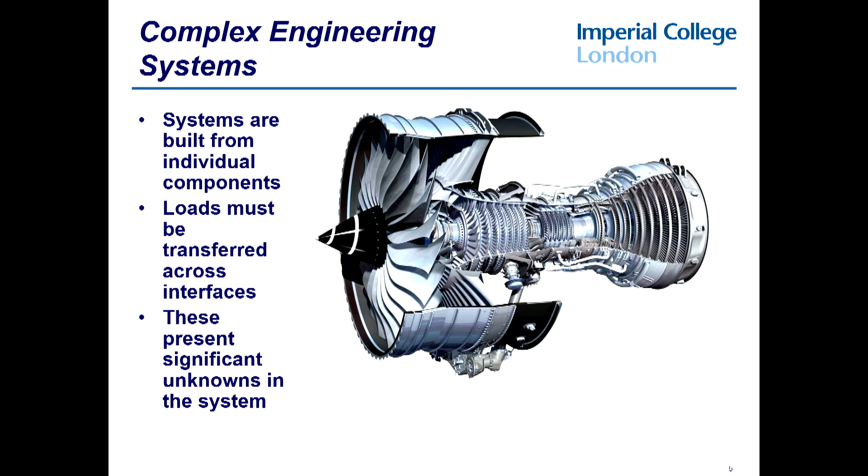And the same is true of the compressor, which is the next stage back, and the turbine, which is back here, and so on. So you can imagine that we've got a lot of loads, and then this thing has got to be mounted in a nacelle, and it's got to be bolted on the wing in such a way that A, it doesn't fall off, and B, that it transmits the thrust loads which it's developing to the airframe, because otherwise the engine is going to go off and leave the aeroplane behind, which is not a terribly good thing. And the thing about those contacts is that they actually present significant unknowns in the system.

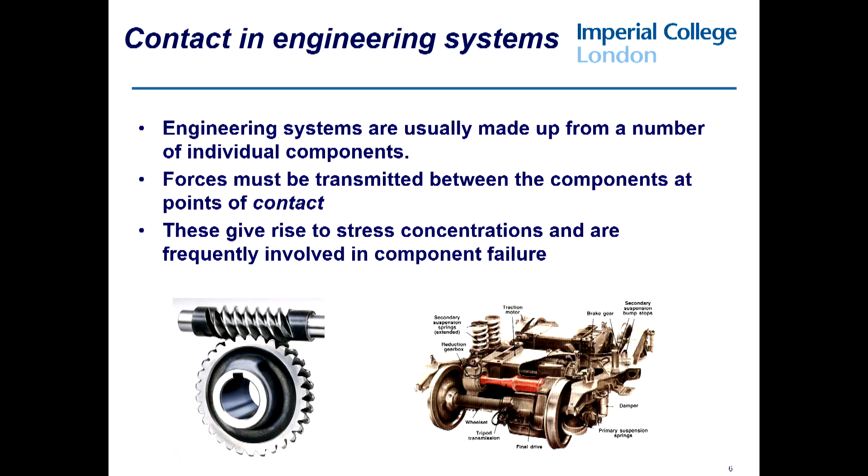So we make our systems up from a number of different components. We've got to transmit forces at points of contact between those components. These give rise to stress concentrations, and they're frequently involved in failure, but they also present us with significant difficulties when we come and try and simulate the system on our computers. And simulation is becoming increasingly important, of course, because testing is very expensive, product cycle times are coming down. We simply don't have the luxury of building something, seeing how it behaves, and then refining it.

I'm told that when you go to Dyson's place in Wiltshire, there's a sign in the entrance, and it says 1,000 prototypes to build the first vacuum cleaner. And that might sound very impressive, but of course it would have been better if it had been one. So, building a lot of prototypes is not necessarily a good idea.

So, it's fairly obvious we can't make complicated things out of a single component. We need different geometries, we've got restrictions on size, we need different materials, and fairly obviously as well, those of you who are engineers in the audience, we love taking things apart, and if it was made of one component, we wouldn't be able to take it apart, and that would be a severe disappointment to us. But transferring a load across an interface is not easy, and it turns out to be a very complex process. Even if we take the simple case of a normal load, where we're simply transmitting pressure, it's quite difficult to design the interface without leading to concentrations of load and concentrations of stress.

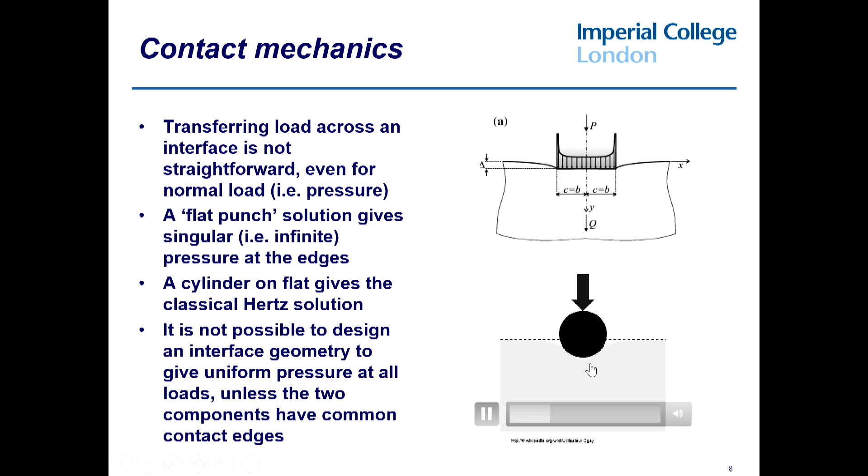So, for example, if you take a flat punch and you press it down onto a surface, you might think that that would generate a uniform pressure. But in fact, what you would find is that there are stress concentrations at the edge, and indeed, if the punch is rigid, those concentrations become singularities. So pressure becomes infinite at the edge. If, on the other hand, we take something like a cylinder and we push that down, you will see that you get deformation of the two bodies, but the pressure will be largest in the middle, and it will fall to zero at the end.

And it turns out that it's not possible to design an interface that carries uniform load across a range of loads, unless the two components perfectly match, and then you start to wonder why you've got two components in the first place. Okay, so that's contact mechanics.

What can go wrong? Well, this is one of my favorite video clips, and I apologize to those of you who've seen it before, but you will understand why I want to show it. It was on Australian television news. Can we have some sound, please?

To dramatically abort its takeoff from Melbourne, tonight preparing to finally fly out of Australia.

Oh, I did say it would do this.

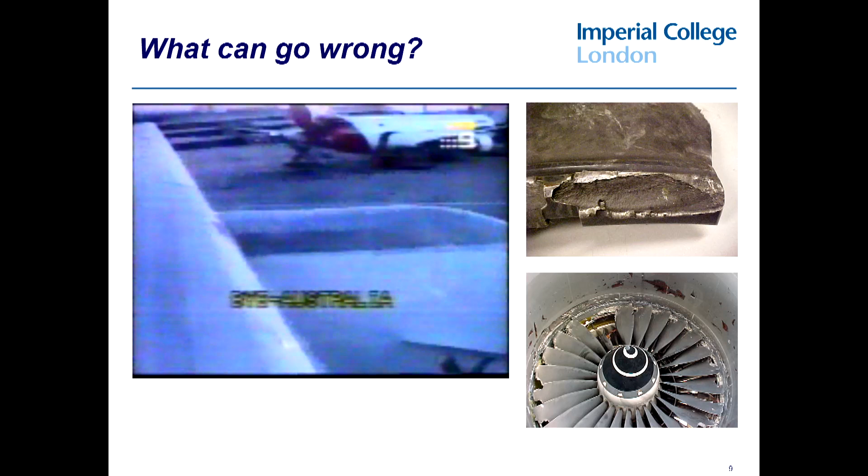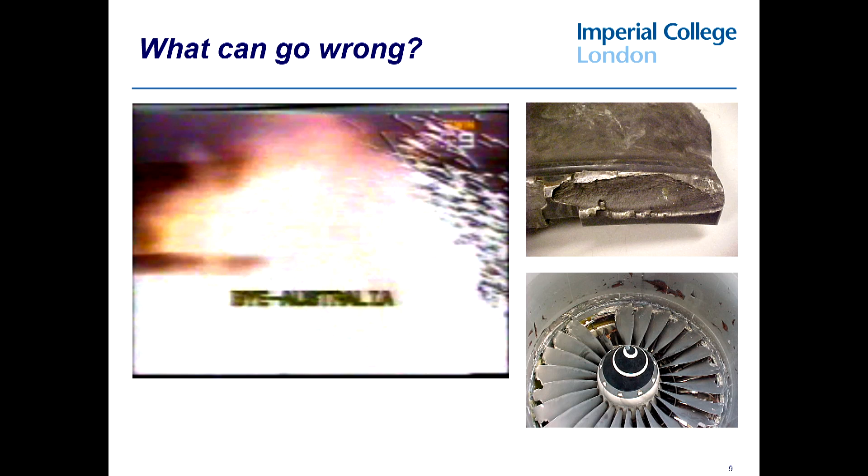It was a frightening experience for those on board when an engine of the Emirates Airlines jet burst into flames as it rolled down the runway. One of the 213 passengers happened to be filming their farewell to Australia as the Emirates Boeing began to take off just before 9 p.m. As the flight crew accelerated the engines, they all got the fright of their lives. A loud explosion. I actually thought a bomb had gone off on the aircraft. There's a big flame and the jittering and the...

There we go. Well, that will actually do. The thing I learned from that is if you ever see anybody videoing out the side of the aircraft when it's taking off, just tell them to stop. It's quite extraordinary. I mean, that's only happened about 3 or 4 times to Rolls-Royce engines in service, and yet somebody was filming it.

And just to put it into context, that happened 2 weeks after the Concorde crash in Paris, and you can see why those people are nervous. What happened was that the engine lost a blade here, and you can see it's damaged the trailing blade and all the tips and so on, and there's the failure, and essentially it's a fatigue crack which has started from pretty much the edge of contact. There are a few subtleties in there which we can talk about later if you wish.

Here's another example. This one isn't a Rolls-Royce engine, but it's much more dramatic in a way. So here the engine in flight, the same things happen, but in flight it's lost the whole of the front of the nacelle, and unfortunately a piece of that nacelle penetrated the fuselage and somebody was killed in that incident.

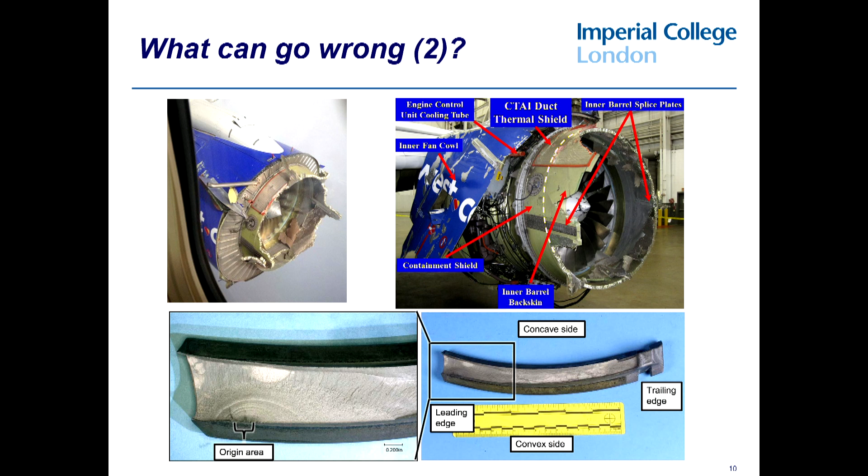So why do these things go wrong? Why do they fail in a way that's much less predictable than the parts of the component which are not subject to contact? Well, to answer that question, we have to start talking about tangential loading. So we've been talking so far about normal loading, where we just have pressure between the two components.

Now we want to see what happens when we try and move them tangentially relative to each other. So, in effect, we're pushing them to see if they will slide. And that tangential loading is resisted by friction, and we're all fairly familiar with friction.

I remember as a child, my parents bought an encyclopedia, and this was all before internet and before Wikipedia and so on, and one of the pages that fascinated me was a page which said what would happen if there were no friction in the world. And it had various diagrams of locomotives crashing and various things.

And of course, we do experience it ourselves, because if you try and ride your bicycle on an icy morning, which I do on occasions, particularly now that I have to get to the station in a hurry, and you come round a corner and there's an icy puddle, you will experience what the world would be like without friction, and it's a jolly dangerous place.

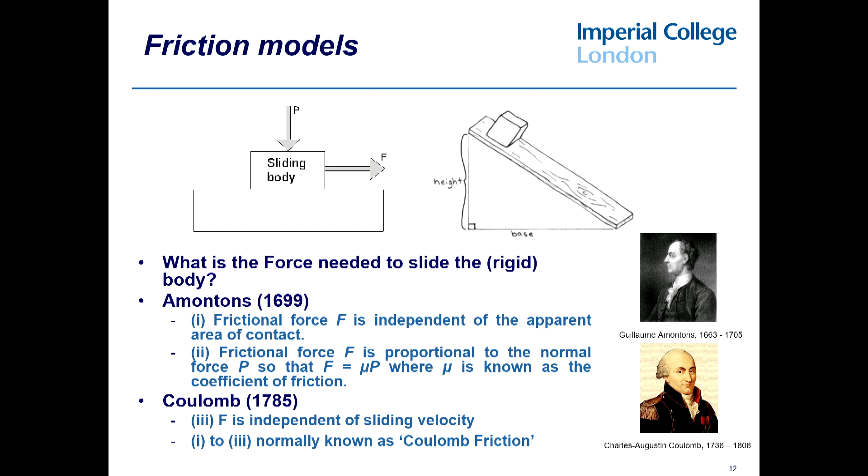So if you take a brick and you put it on each of its sides and try and slide it, the force will be exactly the same. And similarly, he also said that the frictional force is proportional to the normal force, so you get this simple equation, F equals mu P, where mu is known as the coefficient of friction.

And if you do this experiment with a block of wood, you get the answer that mu is about 0.3. So that tends to be the figure that people have in mind, and it's amazing when you start talking to people with, as it were, problems in contact, and they may have not put any friction in at all, or they may have put some in, and if they put some in, you say to them, what coefficient of friction did you use? And they will say 0.3.

And you say, where did you get that from? And they said, well, it kind of seemed about right. And often they're kind of thinking back to that school experiment. And in fact, what we will see is that with metals on metals, the coefficient of friction is anything but 0.3. And then about a century later, Coulomb comes along and says that frictional force is independent of sliding velocity. And none of these three statements are completely correct, but of the three, that one is the least correct.

So the message is absolutely clear. If you want your name associated with a phenomenon forevermore, find out a couple of things that somebody said which are right, add something that's wrong to them, and that's where you go.

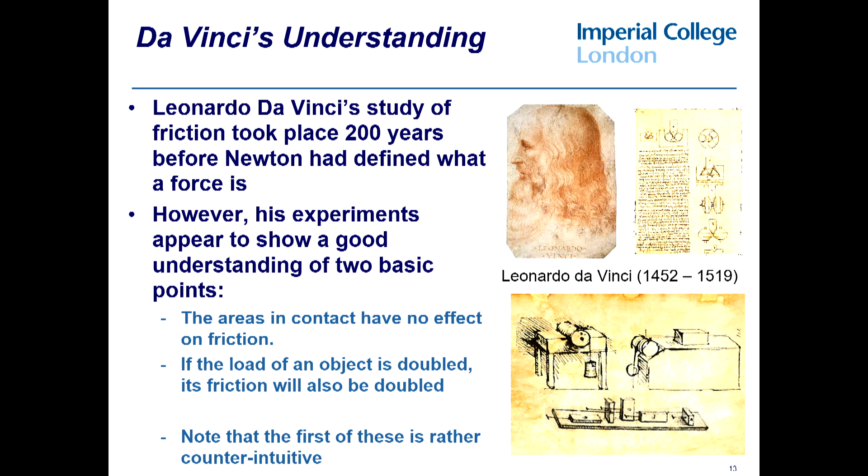But in fact, more recently people have discovered that actually Leonardo da Vinci was studying friction a couple of hundred years before. And these are some of Leonardo da Vinci's beautiful sketches from his notebook. I mean, don't you all wish that your students would sketch the apparatus like that? And his experiments and his notes show that he had a good basic understanding of these two points: that the areas in contact have no effect, and if the load of an object is doubled, the friction will also be doubled.

So he knew what Amontons knew, and he knew it 200 years before Newton defined what a force was. And I think that's quite extraordinary. We think of Leonardo as being quite extraordinary in a number of ways, but da Vinci knew about experiments. He was able to determine what was going on between two sliding interfaces, and yet there was no formal definition of a force.

Now, the first of these is, to some extent, rather counterintuitive. If you ask an undergraduate, why do racing cars have big fat tyres? Most undergraduates will say, well, it's to get more grip in the corners. And of course, most undergraduates would be absolutely right. That's why racing cars have big fat tyres. And then you say, how does the frictional force vary with the area of contact? And they say, well, Coulomb's laws tell you that it's independent of the area of contact. So then you say, why do racing cars have big fat tyres?

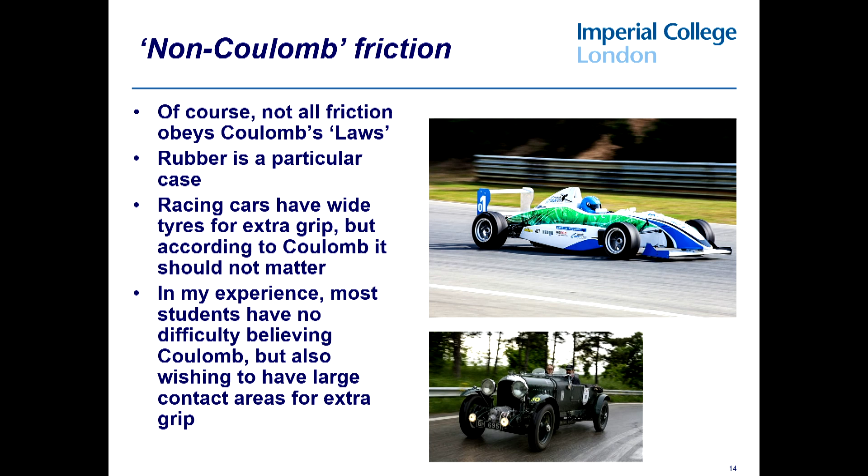And it's very surprising how people can carry these two contradictory, as it were, facts in their minds and yet not see the contradiction. And the answer to the conundrum, of course, is that rubber is not a Coulomb material. And indeed, these so-called laws of Coulomb are not the same as some of the other laws of applied mechanics, which we're going to come on to.

So, why did I start getting interested in this? Well, one of the reasons was, following that kind of incident in Melbourne and various other things that were going on, we got involved with doing some test work on these kind of features up here, which are essentially representing how we fix the blade in the root, in the disc. And you can see here these cracks which are developed from that contact.

And we came to the conclusion that really you wanted to do one of two things. You wanted either to make the friction zero, and in that case there's no problem, or you want to make it infinite, in which case the two things are stuck together and you might as well be one component, and therefore the problem's gone away.

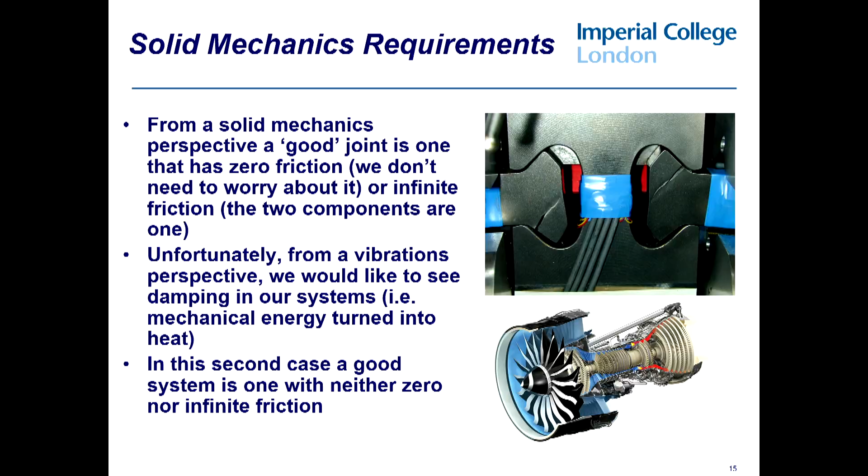Unfortunately, we had not thought about where the loading was coming from. And the loading's coming from vibration, and as far as the vibration perspective is concerned, you want the friction to be anything but infinite or zero. You want it to be somewhere in between those two things. And so you have to start looking at this problem holistically. You have to start to understand the solid mechanics, the contact mechanics, the tribology, which is what's happening at the surfaces, and the dynamics of what's going on.

So let's say something about dynamics. And many of you will have come across this equation in one form or other. It's probably the most important equation in applied mechanics. And I like it for a number of reasons. I like it because it's so simple. For the mathematicians amongst you, it's obviously a second-order linear differential equation. That's fine. But what you've got in here is a couple of things from the greats, really, of applied mechanics.

So what we have here is a force, and typically we think of a periodic force, so something that's varying with time. And first of all, we have a term which is stiffness times displacement. And the man who figured this out was Robert Hooke, who said that force is equal to stiffness times displacement. So that when you apply a force to something, it bends or it displaces out the way, and at least to start with, that force that you get is proportional to the displacement.

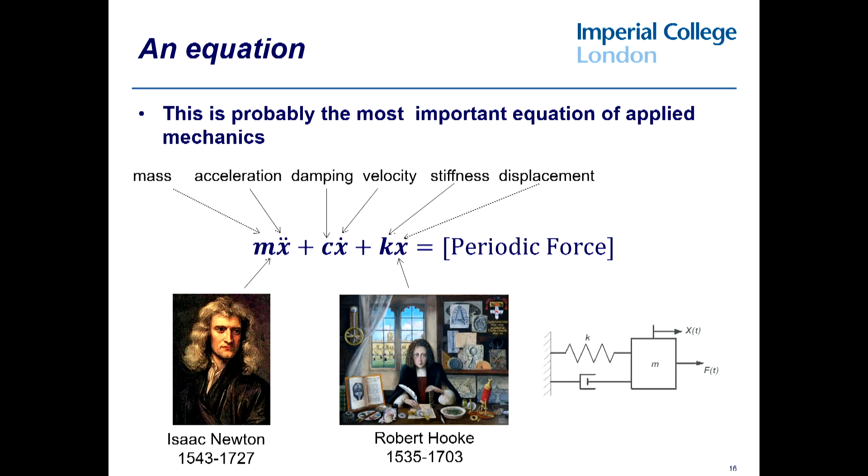And the thing about Newton and Hooke is they hated each other. They absolutely could not stand each other. And Hooke had the misfortune to die earlier than Newton, and they were perennially fighting over who'd thought of what first. And Newton pretty much erased all that there was in the Royal Society relating to Hooke. So there are no extant, as it were, contemporaneous

portraits of Hooke. The other thing that's interesting about Hooke, so they both were sons of clergymen, but Newton came from a fairly wealthy background, and Hooke came from a very poor background, and in fact his father died when he was very young. And Hooke actually was a servitor at Christ Church, which meant that he paid for his studies by serving the richer students. And one does sometimes wonder whether student funding mechanisms are not going in the same way at the moment. But I won't get into that.

Okay, so there's the equation. What's the consequence of that equation? Well, the consequence of that equation is found when we try and excite a system at different frequencies. So basically what we're doing is we're taking a force here and we're varying it, and we'll vary it very slowly to start with, and then we gradually increase the frequency of that force.

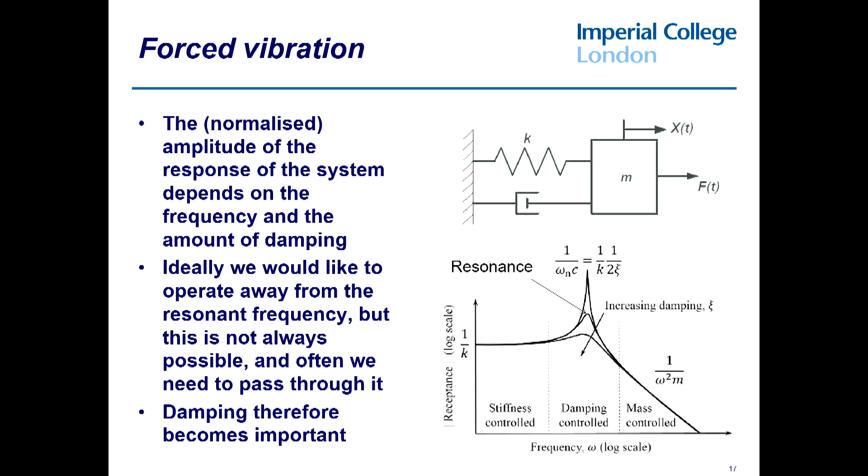But somehow they don't always take my advice. Anyway.

You know, isn't applied mechanics a wonderful thing? You know, I sometimes think that we should have an applied mechanics art show, and you could sell this stuff for millions, and we'd all be a lot richer.

Okay. So why is friction so important? Well, friction is important because actually in most structures, that's where the damping comes from. The damping isn't this nice linear damping that you see in that equation. It's actually frictional damping. So for example, if you take something like this, which is a disc from an aircraft engine, and it's got lots of blades in it, that is kind of reasonably well behaved. It's not perfectly well behaved, but it's reasonably well behaved. Why is that well behaved? Well, because it's got lots of joints where the blades fit into the disc, and what that means is that it's got quite a bit of damping.

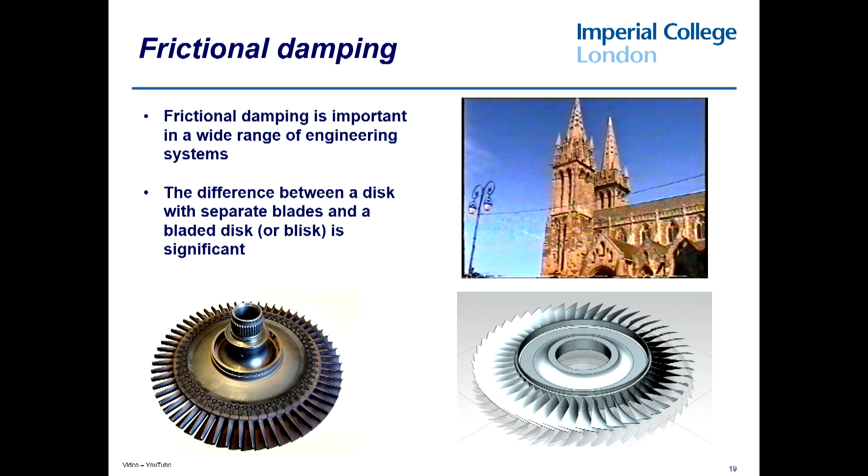So the first of those bells was cracked, and the second one wasn't. And you get a completely different response, because in the first case, the two sides of the crack will rub together, and that will absorb energy, and that will damp out the vibrations. In the second case, it's a bell, there's no cracks in it, and it rings.

And indeed, some of you will be old enough perhaps to remember the wheel tappers who used to go along and bang the wheels of the railway coaches, trying to look for cracked tyres, and basically they're looking for that. If you hit one with a crack, it will sound much duller than if you hit one without a crack.

Okay, so what we thought we had was this nicely behaved equation here with a damping term where the damping force behaved linearly with velocity. So it went like this. And that's a reasonable approximation for things like shock absorbers, but it's absolutely hopeless where we have friction, because what you get with friction is that Coulomb says, well, or Amontons or Leonardo or whatever, says it's constant with velocity if you're sliding in one direction, and if we slide in the other direction, it reverses sign.

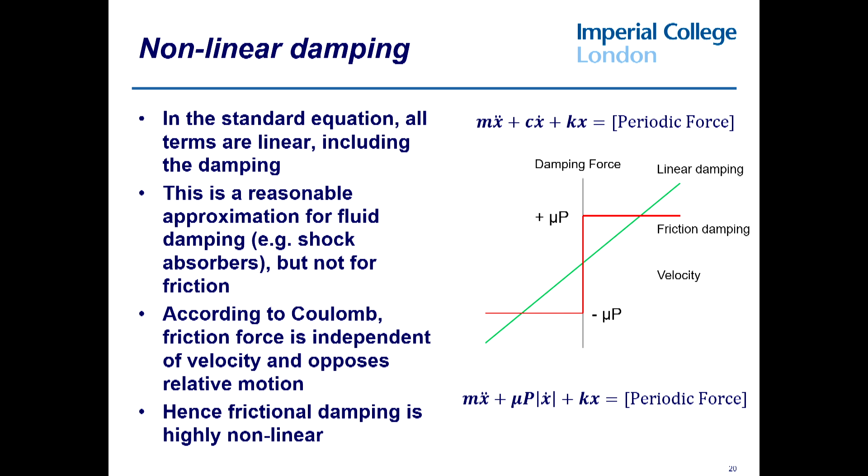So actually, we now need to modify the equation to look like that, and now we've got a super equation because we've got Newton in the first term, we've got Leonardo in the second, and we've got Hooke in the third. And you know, what better equation could you get to combine the greats of applied mechanics?

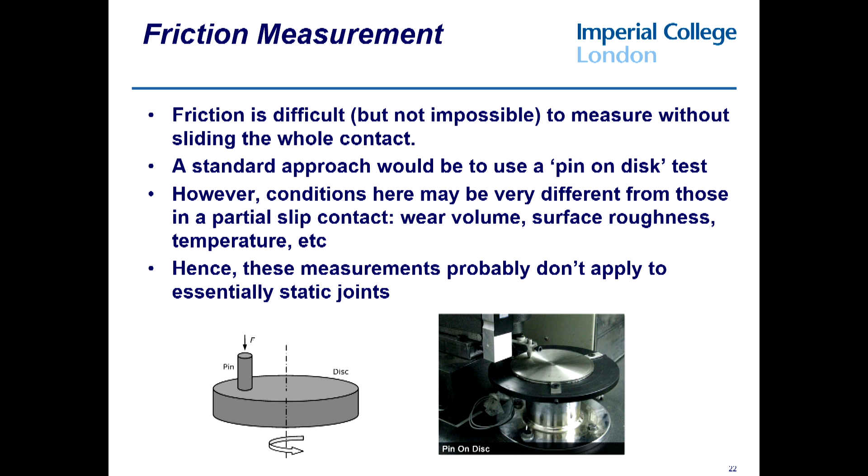Well, fine. But the trouble is here, we've got a very, very different system from what we've got in most of the joints in the engine. Here we've got a sliding contact. We've got temperatures going to build up. We've got wear particles which will be exposed, and so we'll have a very, very different development of friction. So this isn't a good test.

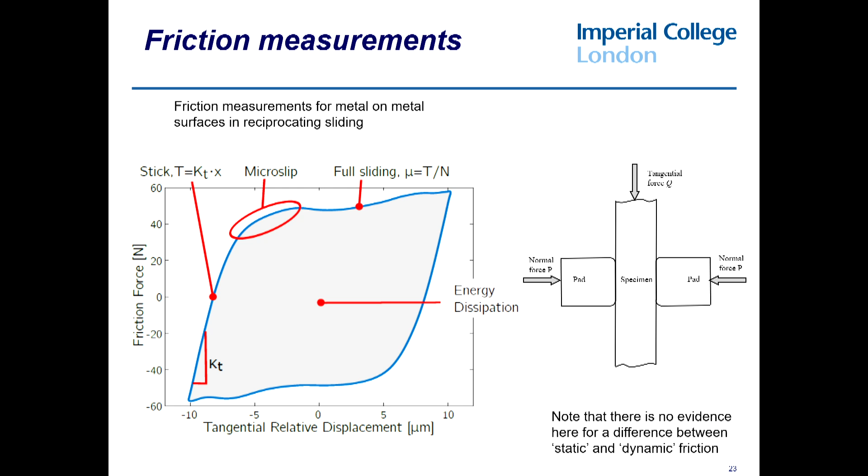And then we have a phenomenon here where if the contact were, as it were, perfectly stiff, then we would simply have a rectangle here, but in fact we've got a slope on there. And this is due to some compliance in the contact, and I want to explore in the remains of the lecture what that compliance results from and why it's of interest to us.

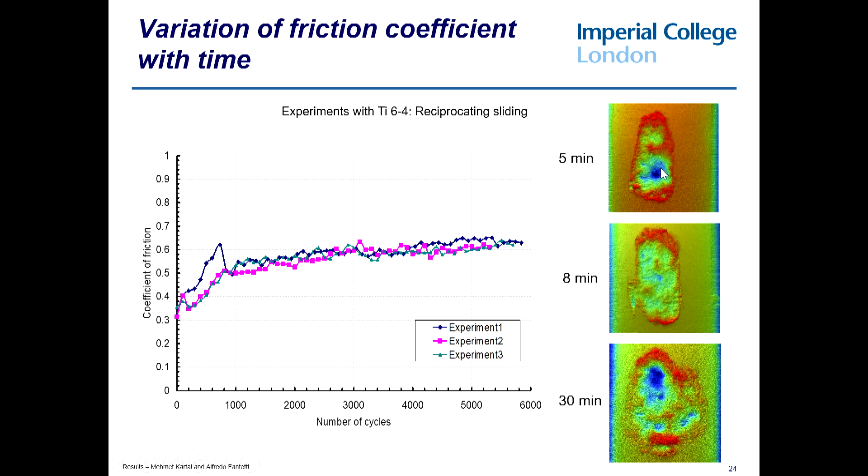So what you will see, these are kind of scars, and the colors represent depth. So the blue is a deep spot, and the red is high spots. And you get material transferred from one surface to another, and the surfaces change quite considerably from how they were when you started the experiment. And this is going on all the time in our engineering systems, and yet we very rarely take account of it.

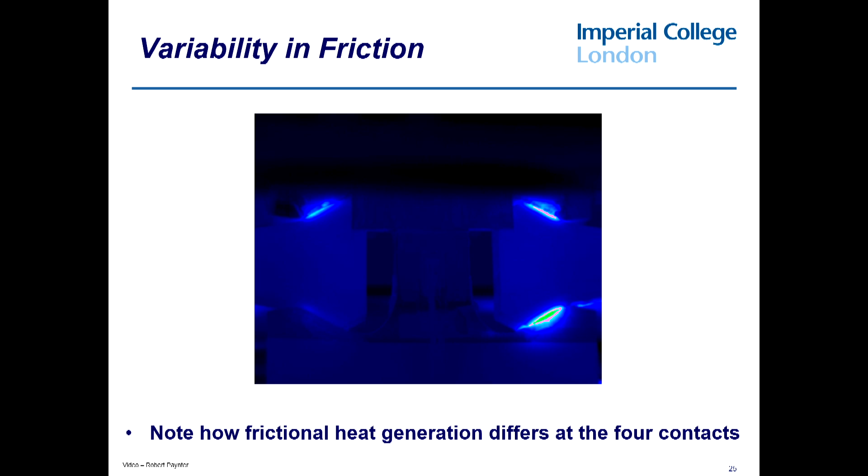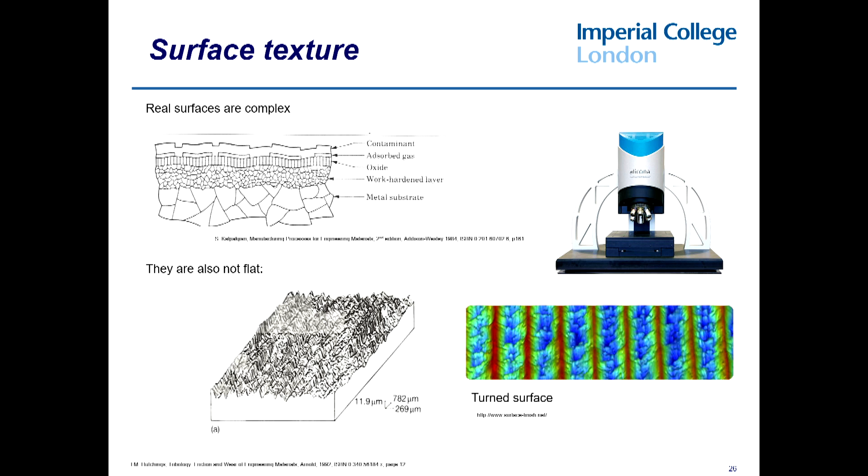You have to be a bit careful with these because you can run away with the idea that putting two surfaces together is like putting the Alps on top of the Pyrenees. And actually, when you look at the scales on here, you'll see that the Z scale, the vertical scale, is highly exaggerated. If you didn't do that, you wouldn't see anything. And actually putting two surfaces together is a bit like putting Cambridgeshire on top of Lincolnshire. They are pretty flat, actually. But nevertheless, they're not completely flat.

And so I've been interested in surface roughness for a long time. I still have my final year project report, and I was supervised by Jim Greenwood, who is kind of Mr. Surface Roughness. And it was great fun working with Jim on my final year project.

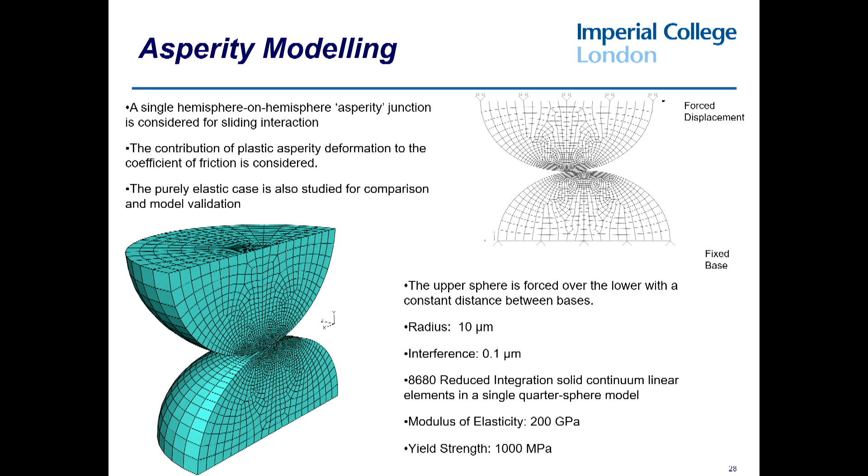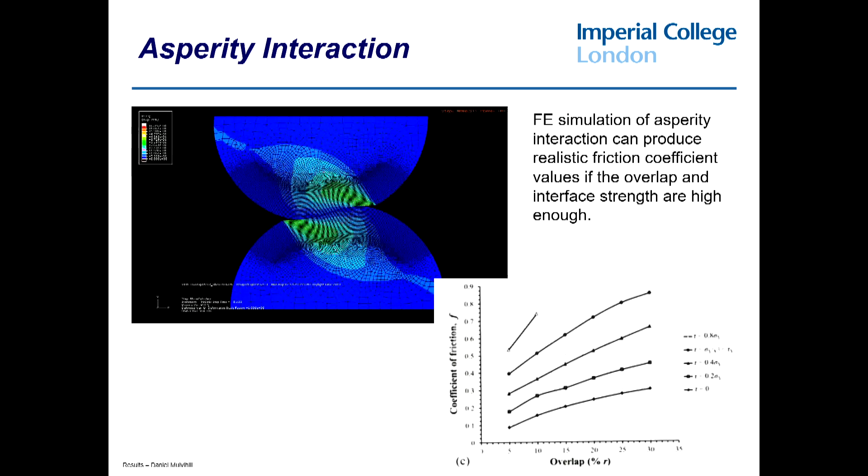We've done over the years a bit of modelling of what happens with roughness. Daniel Mulvihill, who's in the audience, will recognise these models. He put them together, and he did this rather nice simulation of, if you like, part of Cambridgeshire moving across part of Lincolnshire. So all my videos are stopping simultaneously. Anyway, we've got one bump moving across another, and we've got this nice finite element simulation, and he's even put a failure criterion in there, and there's your wear particle.

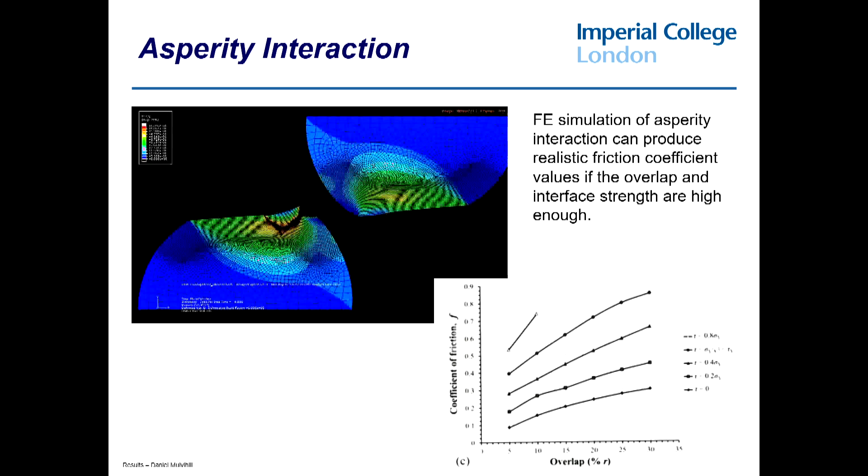And Daniel did some very nice work at different overlaps and was able to generate estimates of the coefficient of friction. And you get some pretty reasonable answers, actually. But, of course, the trouble is we don't have the computational power to do this for realistic surfaces.

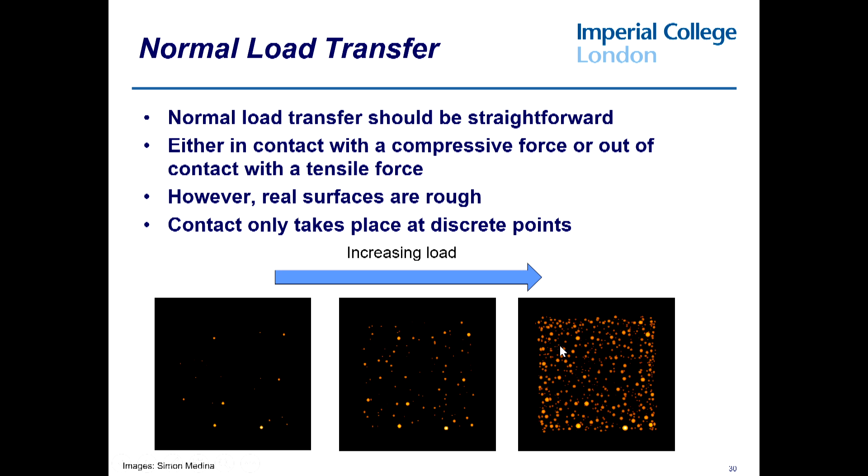And you can model this phenomenon, and you can conclude from that not only about the friction, but you can conclude that a surface is less stiff than it would be if it were smooth.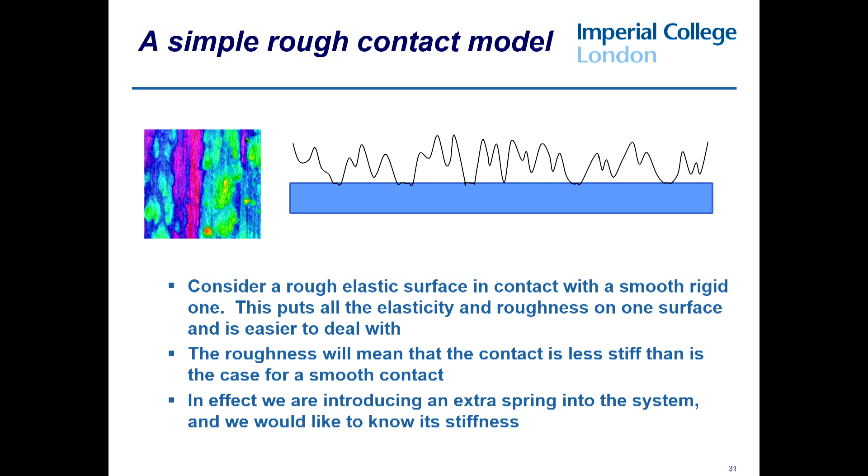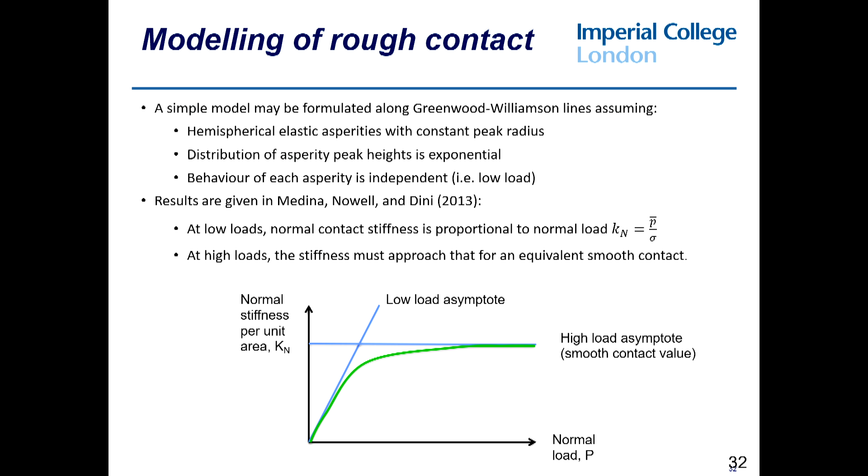One does calculations, and you can find that the stiffness of a surface, i.e. its kind of springiness, depends on the load. So as we push it together, more and more area comes into contact, and the surface gets stiffer.

And what you can do by digital image correlation is you can take each of those images in the video and you can overlay them, and you can match up part of image 1 with image 2, and you can find out the displacement. You can get a complete displacement map. And that's really useful. We can use it in contacts.

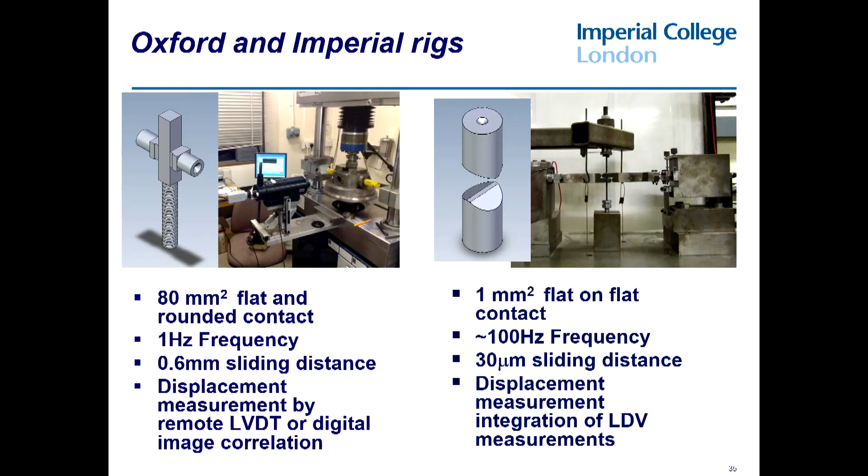And what you can see is that the contact stiffens up. We start here, we get a lot of displacement for a small amplitude and load, and as we go round here, we get much less displacement for our increase in load. We have studied that both at Oxford and Imperial. We've got different rigs, but essentially you get very similar results.

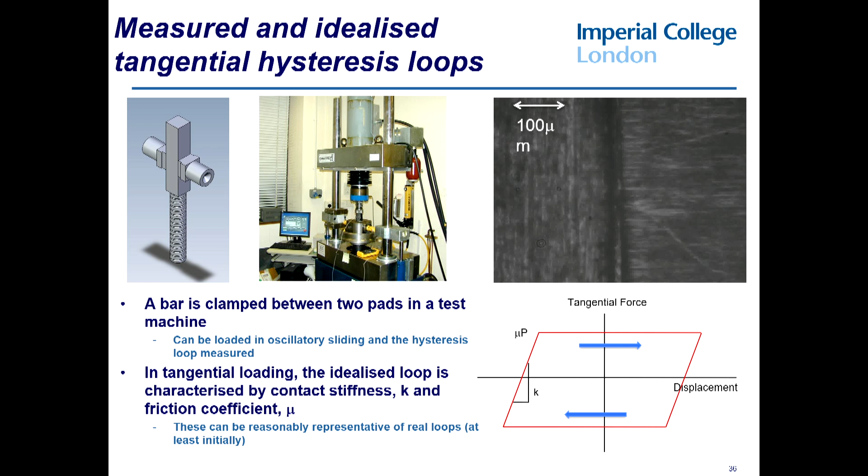And here's an example of, again, zooming in very much on a contact. You can see a little bit of slop in the system, but we can extract from that the kind of displacement data that we need to plot stiffness. And what we find is that contacts change. So not only does the friction coefficient change, but also the stiffness of the contact changes.

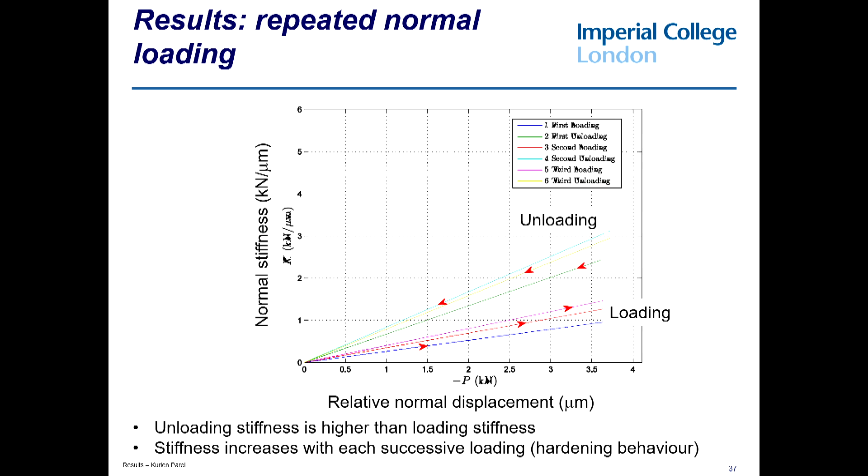So you can see here we've done loading and unloading of a normal contact, and the contact changes, its response changes each cycle of loading. And almost certainly that's because the geometry is changing. And the same thing kind of happens when we try and slide contacts.

So you can see here that here's the stiffness. It will decrease as we try and slide it, and eventually it will reach 0 when we're on the point of sliding. And then when we reverse the load, it'll pop back up to here and decrease and so on. But each time we do that, the contact is getting stiffer.

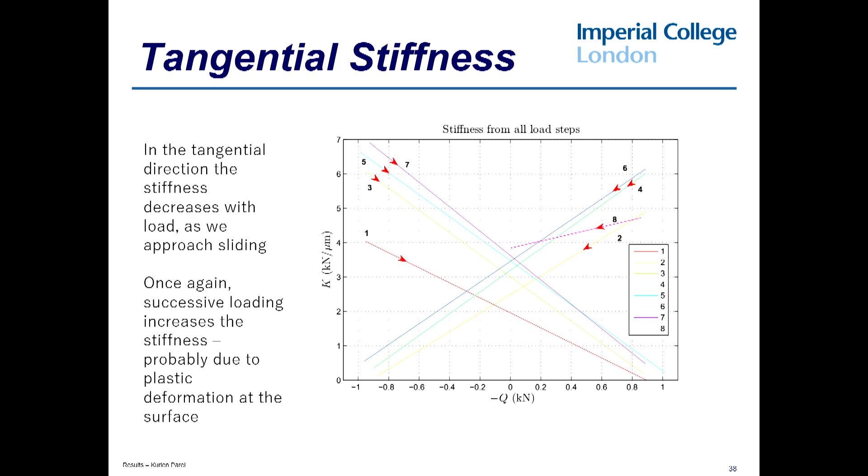Now, it's very difficult to do these experiments, and we haven't so far managed to do them for much more than a few cycles like that. But it's going to be interesting to see how that maps onto what happens if we run the contact for hundreds or thousands of cycles.

Okay, so where does this leave us with Leonardo and the A380? Well, the A380 is an extremely sophisticated aircraft. Leonardo da Vinci, of course, had ideas about aircraft design, and he had some quite interesting ideas about aircraft design.

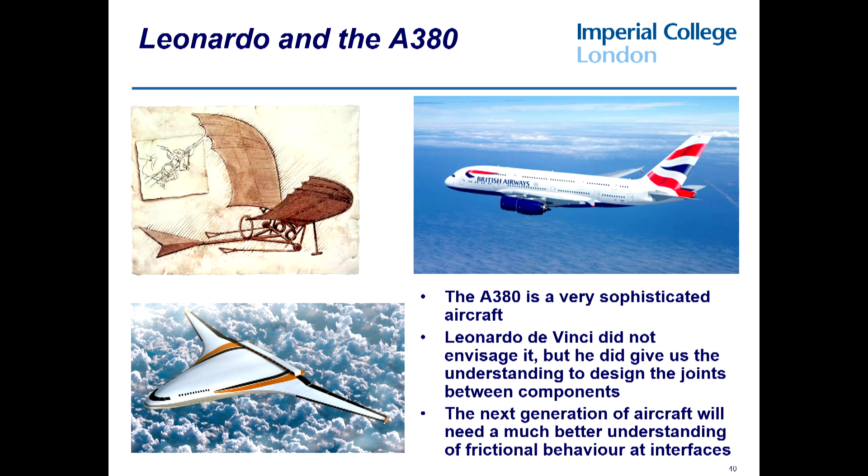We're way beyond that in terms of our understanding of fluids and structures and so on, but this thing is essentially designed on knowledge that comes from about 500 years ago, as far as the interfaces are concerned. It's got us a long way. The giants of applied mechanics really were giants.

The next generation of aircraft, I don't know whether they're going to look like this. Some people will say that they might. But we're going to need a much better understanding of what goes on between components if we are going to ensure that you continue to be safe and that we don't do too much damage to the environment. So, all sorts of things, really.

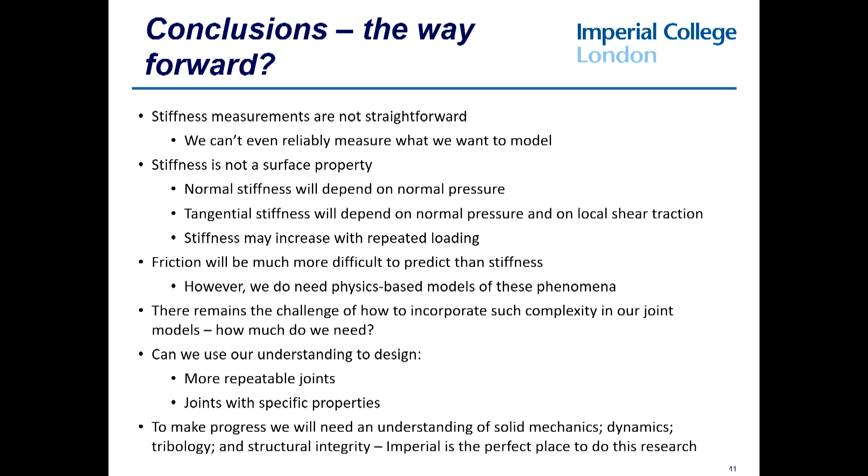To make progress, we will need to understand solid mechanics and dynamics and tribology and structural integrity. And Imperial is really a fantastic place to do work in that area because my colleagues here have expertise in all of these areas, and we have, I think, a lot to contribute over the next 5 to 10 years or so.

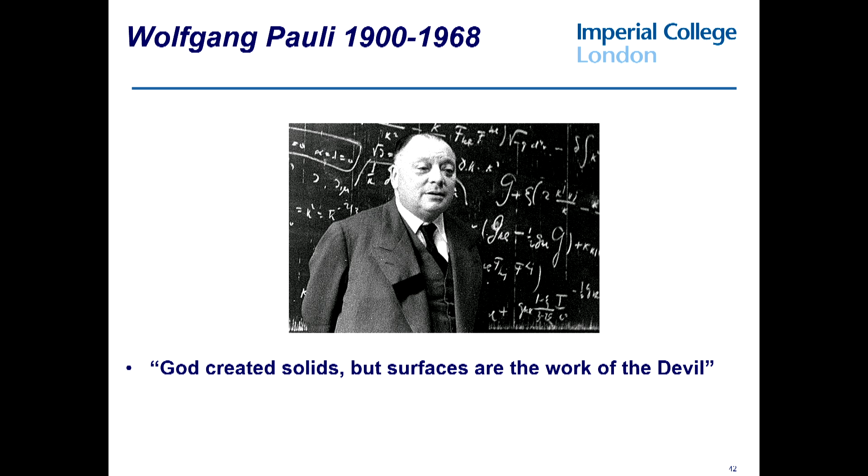I'll finish with this one. Pauli had a lot of interesting things to say, but this is, I think, one that I always like to bear in mind. God created the solids, but surfaces are the work of the devil. They are fiendishly complicated, and that's why they're so interesting.